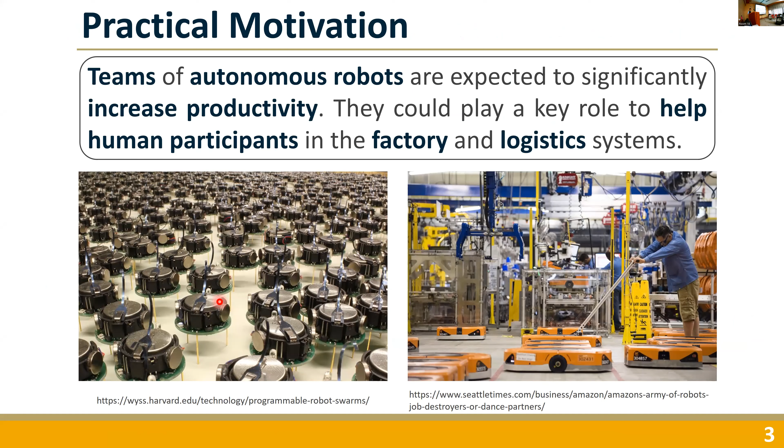Teams of autonomous robots are expected to significantly increase productivity. They could play a key role to help human participants in the factory and logistics systems. So based on our minimalist perspective, we would discuss a possible human multi-robot collaboration on collective object transport systems.

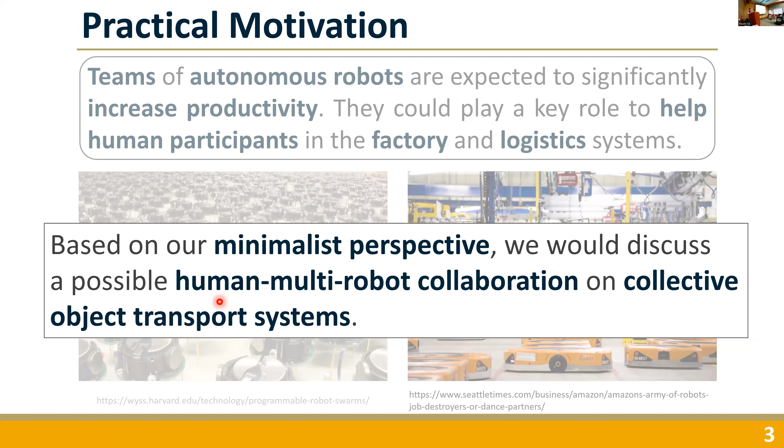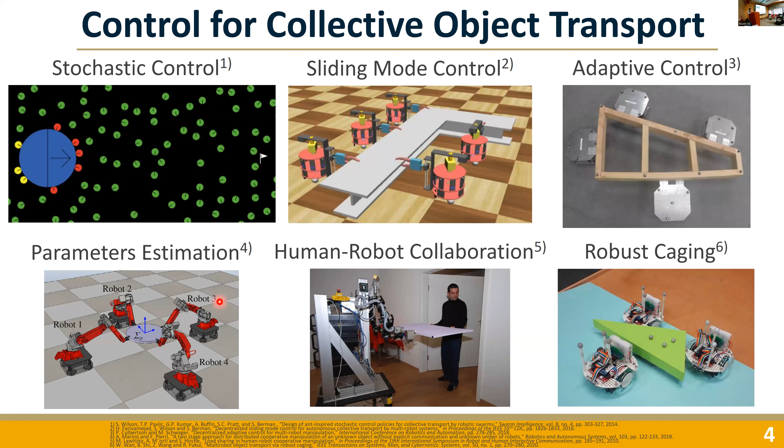Okay, so in accordance with this trend, there are many research on collective object transport systems. However, they apply centralized offline approaches or controllers that do not guarantee optimality in terms of energy and time efficiency. In addition, there are potential issues on collective object transport systems. The first one is computational load because real-time actuation is required.

The other one is communication failures that might cause unstable behavior of the overall system. The final one is that parameters of the object are unknown in practice. So to address these issues, we presented the solution for the force optimization problem.

Okay, so in our framework, we consider multiple agents and one object. Each agent implements only the completely distributed PI/VLC controller, which minimizes the control energy in steady state. Because the object mediates information implicitly between agents, no communication between agents is necessary.

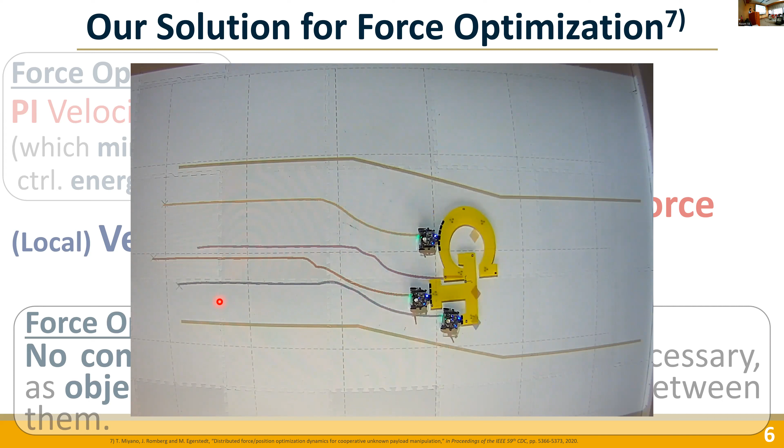So this is just a completely distributed PI/VLC controller. Just switching the local reference velocity, the reference target, they can pass this S-shaped path, S-shaped route.

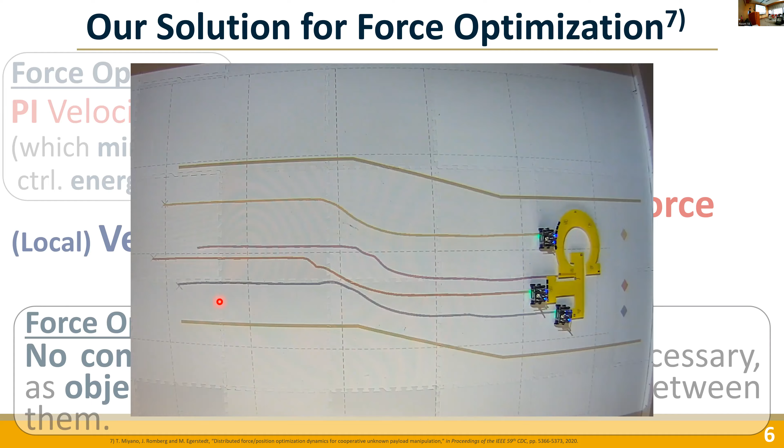Okay, so let me introduce details of our approach. Let me start with formulating the object dynamics. For simplicity, we consider the two-dimension case, but we can straightforwardly extend our solution to 3 dimensions. So we consider a single object and multiple agents. They are rigidly attached to the object.

So here, B is the input matrix of robot. D is the input matrix of external actor, for example, a human participant. And f of x is a centrifugal force. Ri is the cross product of agent i's position relative to the center of mass of object. x is the linear and angular velocities of the object. U is the concatenation of input forces, and U sub ext is the external force.

So we have this state space representation, and we have this system sigma sub x, where the relationship between the local velocity and the global velocities is given as this bottom equation. We see that this relationship is very suitable for the primal-dual framework that I will show you in the next slide.

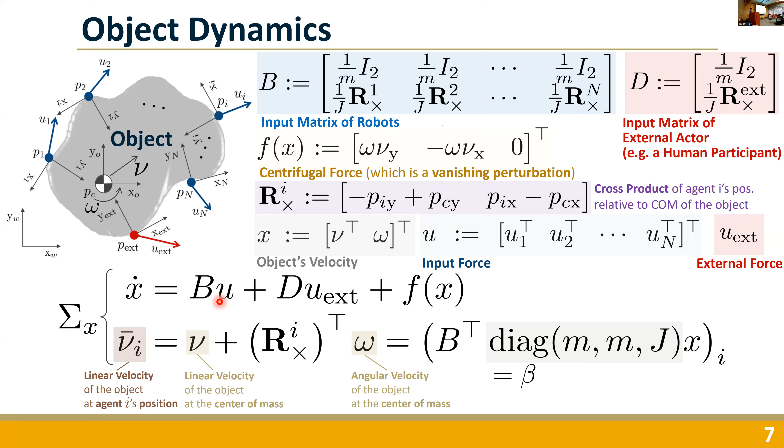The primal update is equal to the distributed PI/VLC controller, meanwhile, the dual update is equal to the object dynamics with a human participant. That is, the object manages the equality constraint, the velocity tracking constraint, through its physical dynamics. So this is a benefit of the primal-dual framework.

Okay, so from this property, we see that each agent does not need to care who a human participant is, because what each agent needs to care about is its linear velocity. So I think this is a great benefit of the primal-dual framework.

So we here analyze the overall system based on passivity. Passivity is an input-output property of the system, such that stored energy is less than the supplied energy.

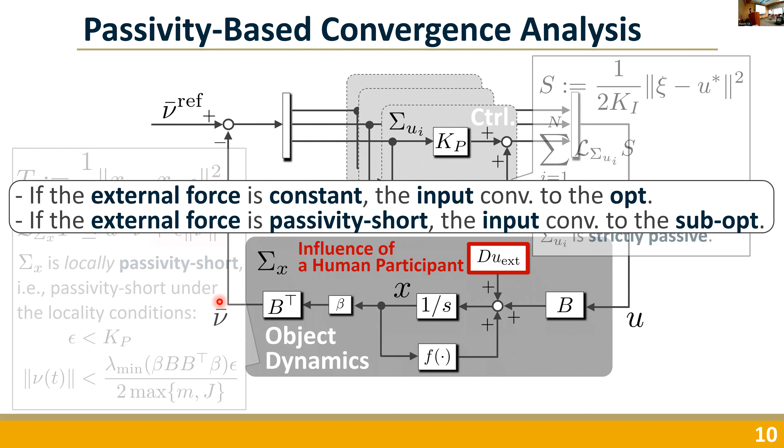Okay, in conclusion, we presented a primal-dual framework for collective object transport systems, which amount to implementing a completely distributed PI/VLC controller. So based on this minimalist perspective, we discuss a possible human multi-robot system where robots do not need to care who a human participant is, and passivity short human participants are acceptable. So in future work, we'll try the experimental verification of the human multi-robot system.

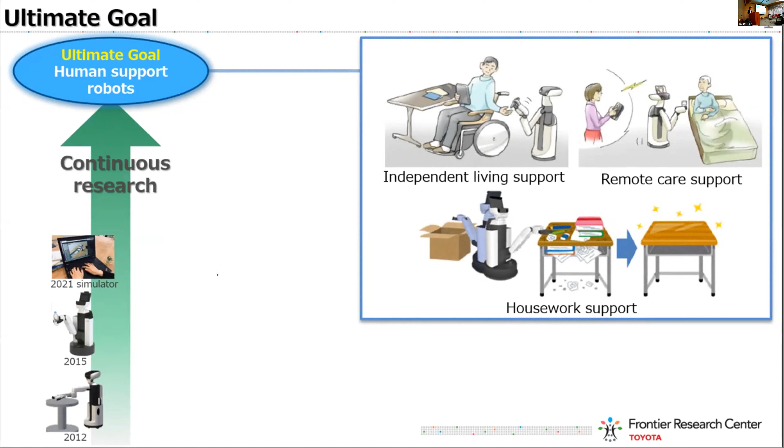We developed a prototype human support robot in 2012, and we started an HSR developers community in 2015. I explain later. And last year, we made HSR simulators available as OSS. At the same time, with continuous research, we think that it is necessary to apply the technologies achieved at each stage to real-world applications.

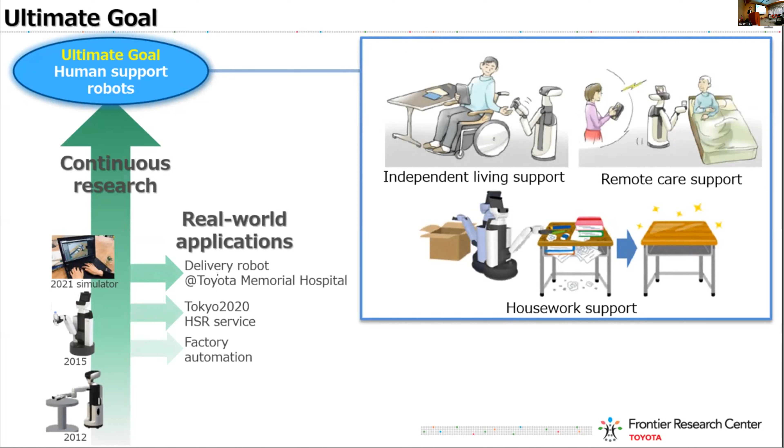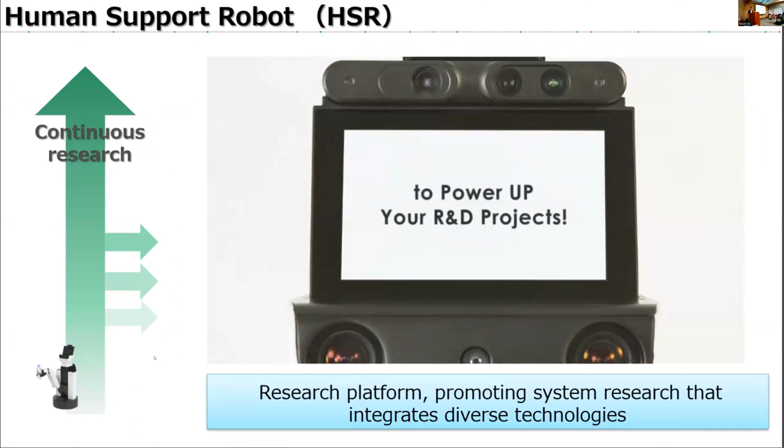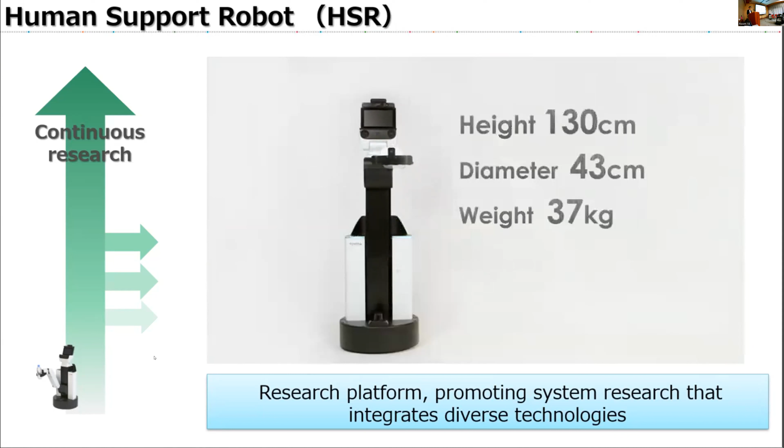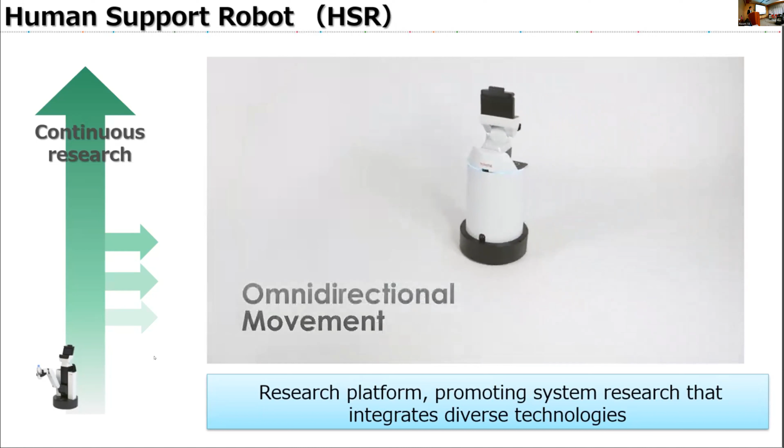First of all, let me introduce our continuous research activities. We have developed a human support robot, HSR, as shown in this video. It is designed to be used in the house and it is capable of picking up and carrying objects. And it's a small size and a simple mechanism with a single arm. We are implementing various technologies on this research platform to realize our ultimate goal. But we think that it is very difficult to realize such a robot for a single company.

That's why we established the HSR developers community, to provide HSR to the researchers who share our objectives and to accelerate the research of mobile manipulators by sharing the research results and knowledge. Currently, in the HSR developers community, 44 research centers from 11 countries participate. And HSR developers meetings are held regularly to share the results of the research and their knowledge.

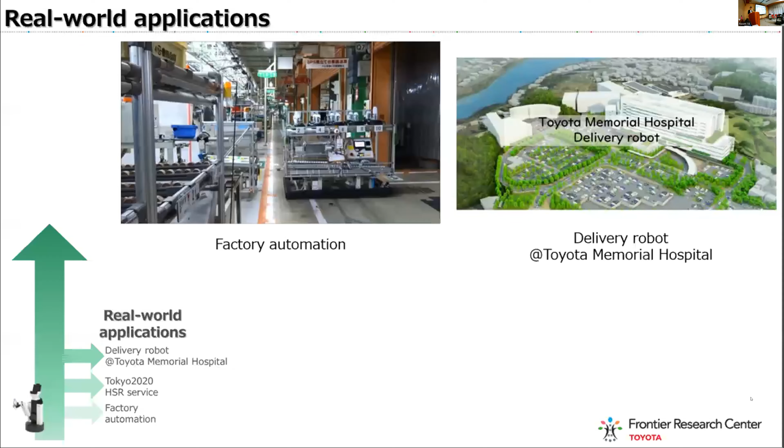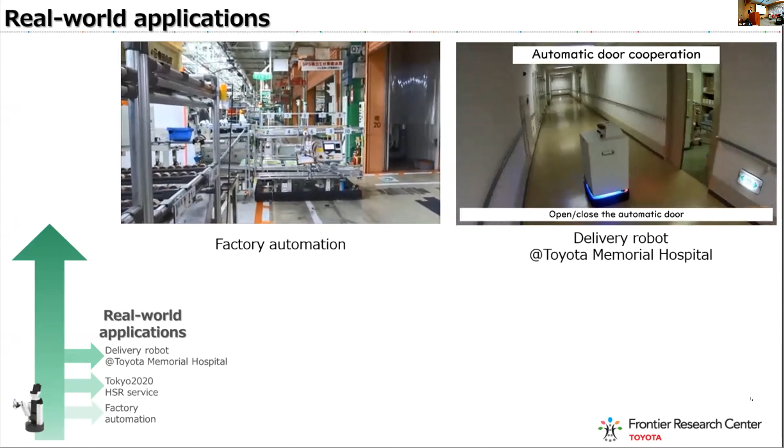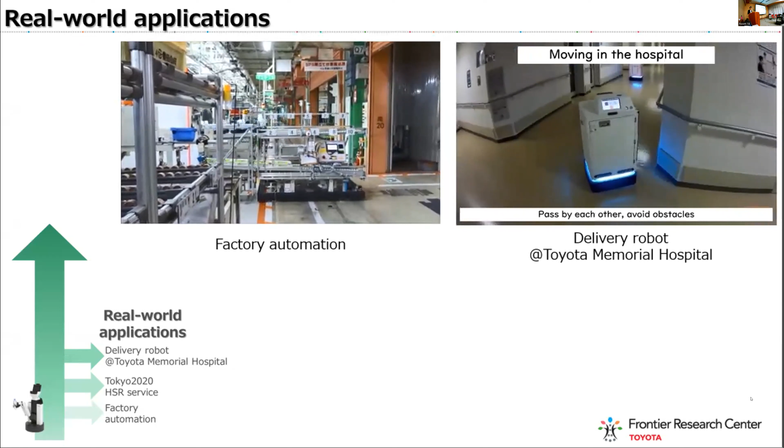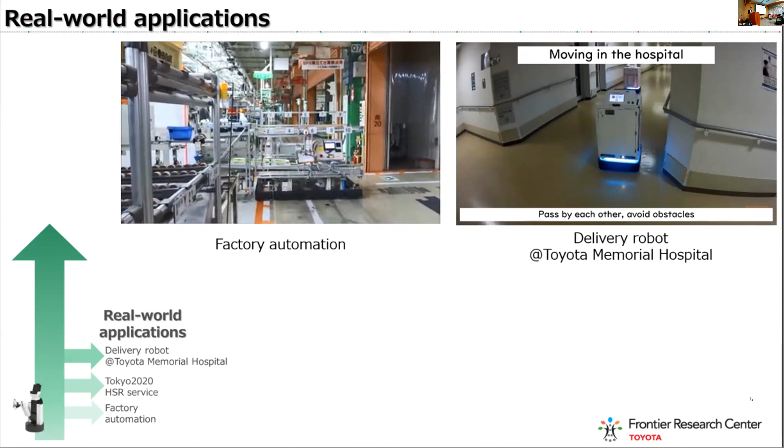Next, I will explain the real-world applications. In the past, we have adapted the technology to the parts transfer robot in our automobile factory. And now we are working on a hospital transfer robot at the Toyota Memorial Hospital to transfer medicine within the hospital. We are planning to operate multiple robots simultaneously to transport medicine, and we plan to start full-scale operation next year. In this presentation, we will introduce the robot service at the Tokyo Paralympic Games as another example of real-world applications.

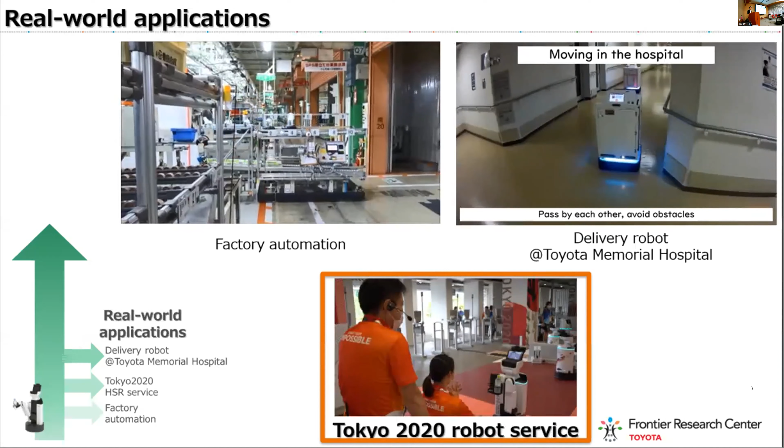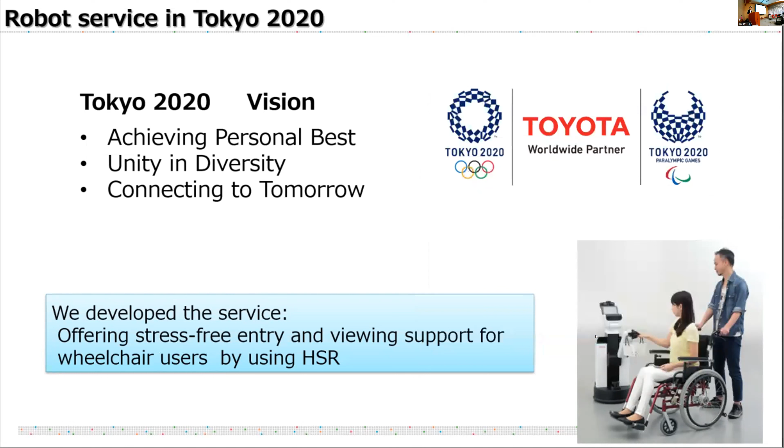The Tokyo 2020 Olympic and Paralympic Games were held last summer after a one-year postponement due to the pandemic. The Tokyo 2020 vision is as follows: achieving the personal best, unity in diversity, connecting to tomorrow. And Tokyo 2020 was held with the aim of bringing globally positive reforms as the most innovative in history. To contribute to this vision, we developed a stress-free entry and spectator support service for wheelchair users by using HSR.

This robot service has two features. One feature is that the robot service is realized by combining autonomous operation with remote manual operation. And the service is provided by the remote operator, who interacts with the spectators through the HSR head display, giving instructions for autonomous operation and operating the arm and the mobile base.

The second feature is that the remote operator team was composed of a mixed team of persons with disabilities and persons without disabilities. By utilizing this robot, people who have difficulties in going to the stadium will be able to provide heartfelt services. We believe that promoting this kind of service would lead to the realization of the Tokyo 2020 vision.

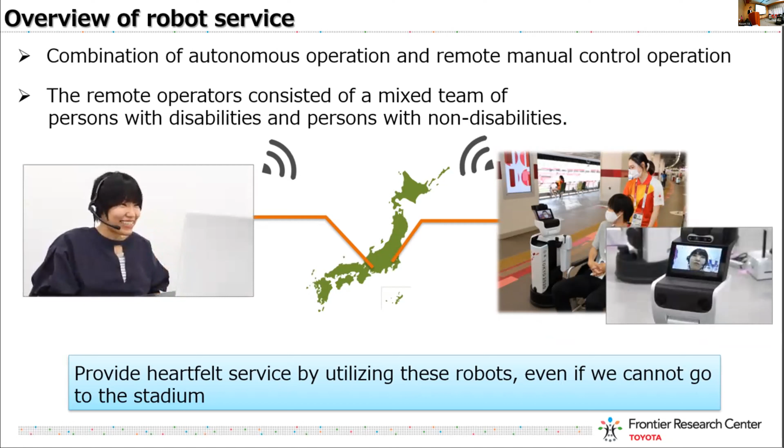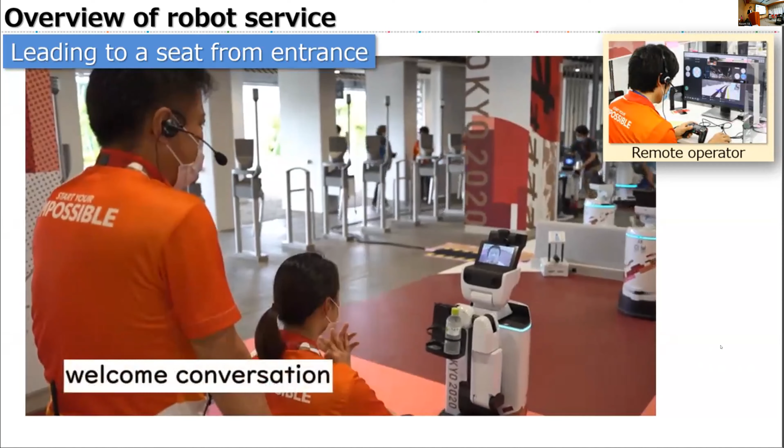Now, I would like to explain the robot service in detail. First, the leading-to-the-seat service. A remote operator meets the spectator at the entrance and has a welcome conversation first.

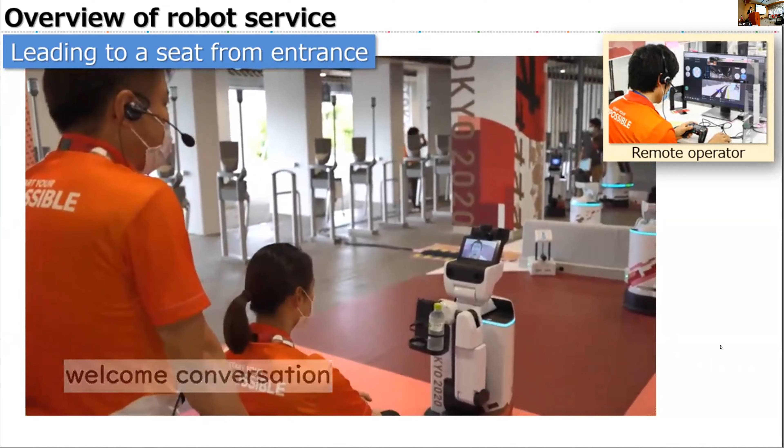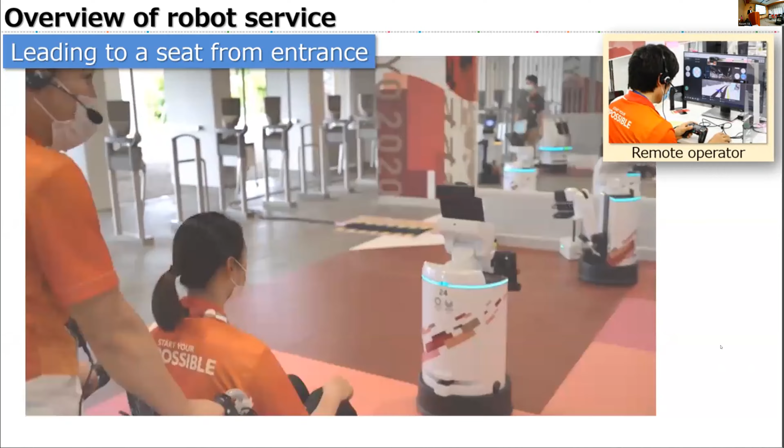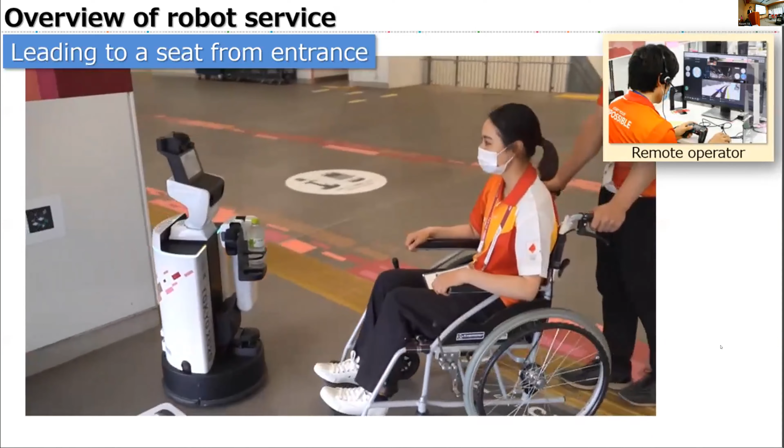After that, the robot leads the spectator to their seat. This movement to the seat is autonomous, and it has a function that when the spectator leaves a certain distance, the robot will stop. When arriving near the seat, it switches to the remote control mode, and the remote operator operates the arm to hand over the welcome drink to the spectators.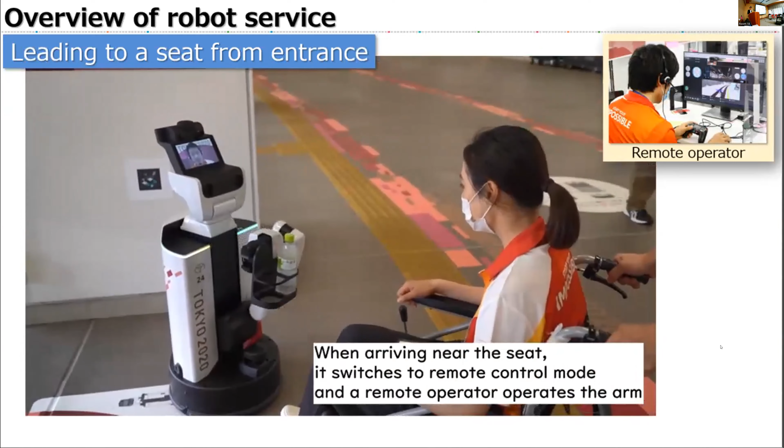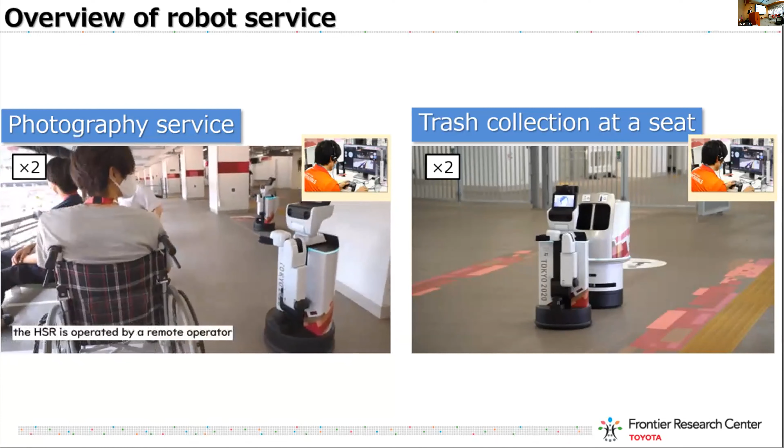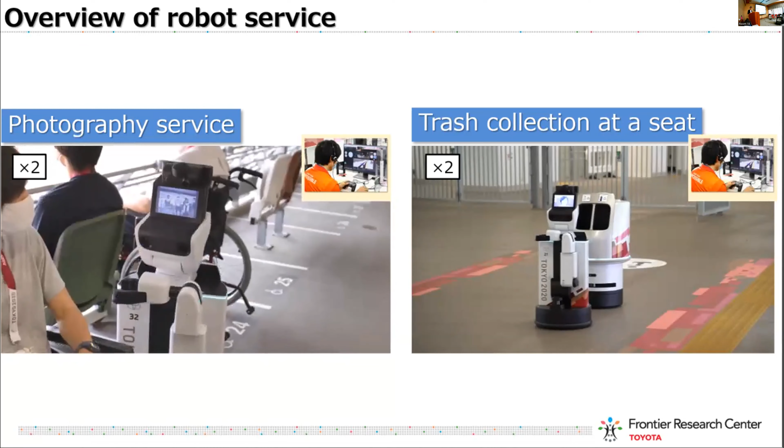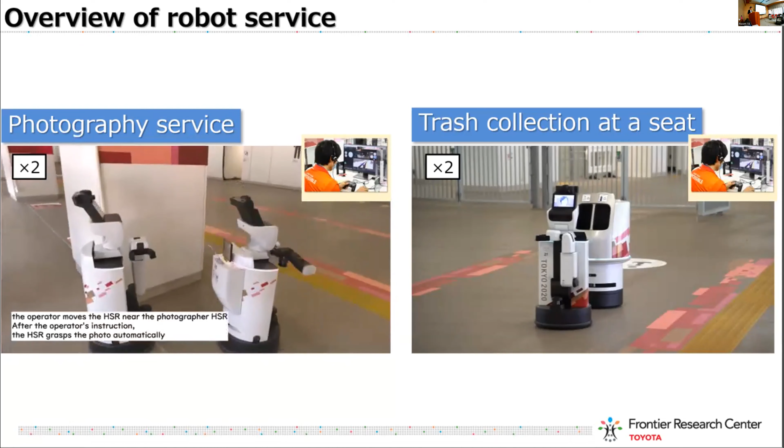We also developed another two services. One is a photography service, and the other is a trash collection service. As for the photography service, the subject HSR and the photographer HSR, whose gripper is changed to a camera, move to the seat in a row. The subject HSR is operated by a remote operator, and the photographer HSR takes a picture while moving automatically, according to the instruction of the remote operators.

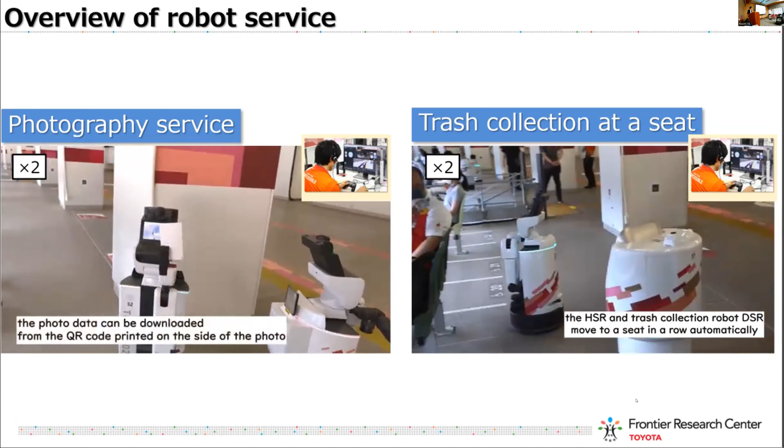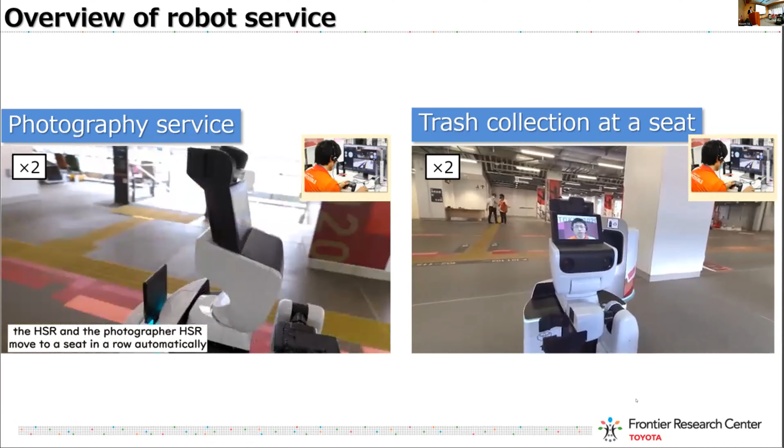As for the trash collection, HSR and the trash collection robot DSR move to their seat in a row. When the remote operator moves HSR sideways, the trash collection robot DSR automatically moves to the place where the HSR was and approaches the spectator's seat. These are the robot services we provided.

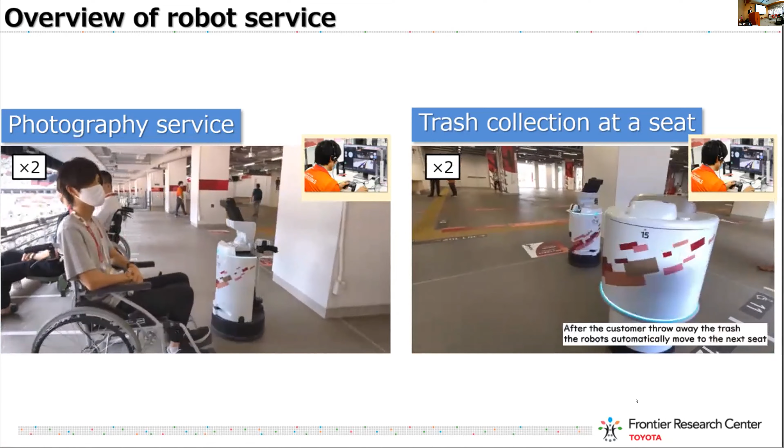In fact, because the Tokyo 2020 games were held without spectators due to the pandemic, we were not able to provide the service to the wheelchair spectators. Instead, we provided the services to the volunteers, press persons, and the competition persons in the stadium. Before we started this service, we were concerned how well this service would be accepted. Word of mouth about this service spread among the stadium staff, and we were able to provide more than 3,200 services during the 9 days of the track and field competition.

Here are some comments from our remote operators. I feel my world has expanded. I would like to bring this experience of diving into the unknown world through HSR to people with more severe disabilities. We believe that remote operation offers the possibility of providing a service using HSR.

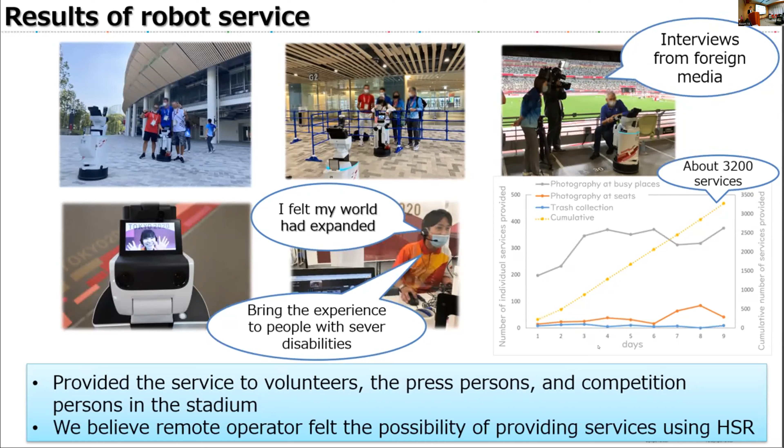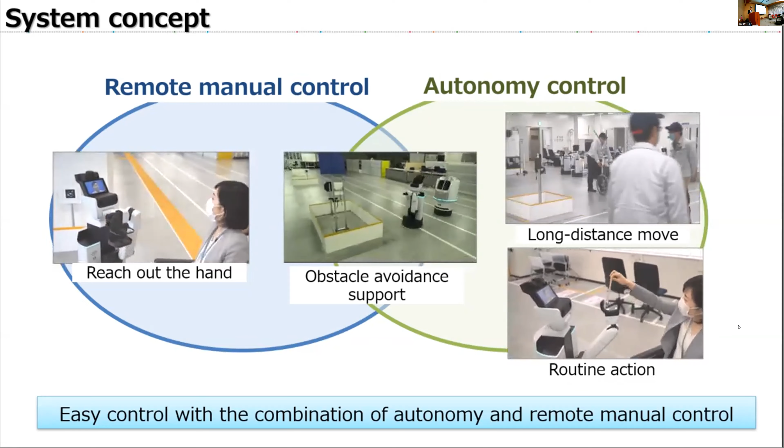Here are some problems we encountered in this robot service. As for the remote control, the remote operator needed to practice to some extent to become used to this operation. Another issue was that slow and careful operation of the arm was required to prevent it from contacting the spectators. In order to solve these issues, we are developing an interface that easily and intuitively conveys the person's intentions, as well as the technologies necessary to achieve both safe and fast operation.

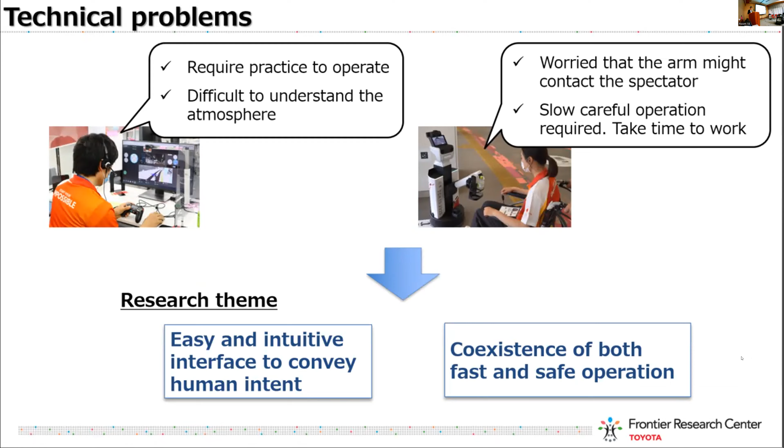Here are some technologies we are developing now. As for the interface, we are developing a 2D hand drawing interface using hand-drawn input with an electric pen. We are developing an interface that allows users to indicate the position for grasping by drawing a symbol that represents the gripper. As for the technology required for safe and fast operation, we are developing a low inertia and high back drivability arm with a wire-driven mechanism. This has already been submitted to this IROS. Please check that paper. And we are also developing a fast and robust full body control algorithm.

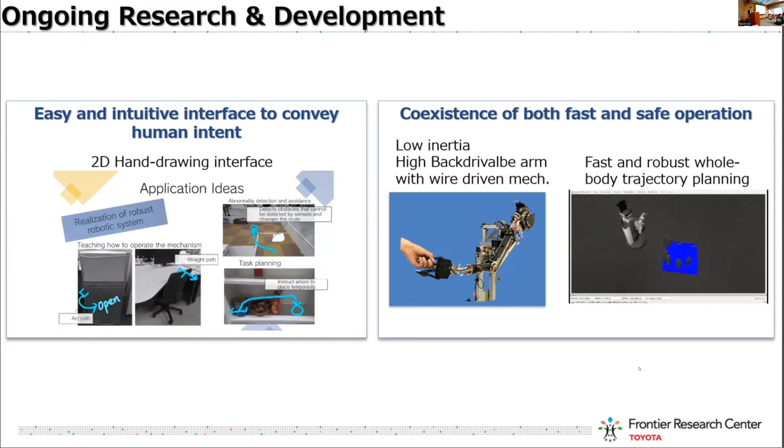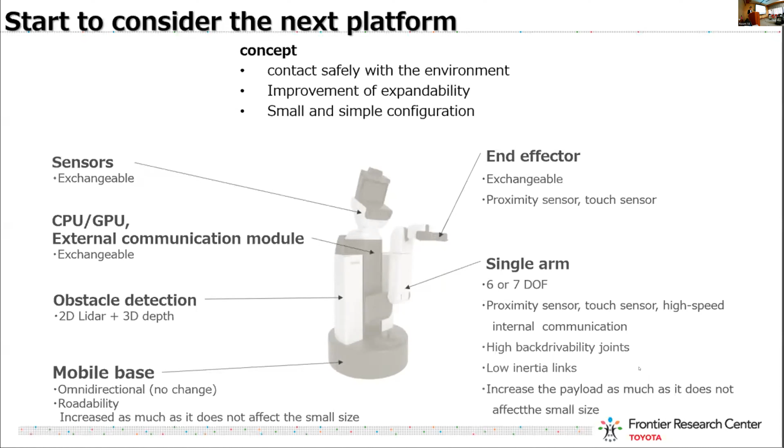And we also started to consider the next platform for HSR. In the next platform, we think it would be good if the platform can contact the environment more safely than the current HSR. We believe that research on gathering meaningful data by interacting with the environment is becoming more active. This is a draft idea for the next platform. So if you have any request, please let me know. I will be happy to hear your request for the next platform.